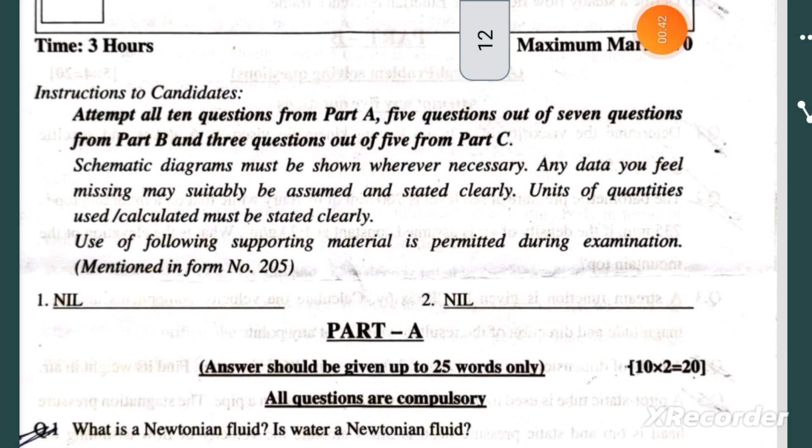नेक्स्ट हम क्वेश्चन पे दे जाते हैं। पार्ट ए है। क्वेश्चन नंबर 1, what is a Newtonian fluid? Is water a Newtonian fluid?

Question number 2, can the coefficient of compressibility of a fluid be negative? How about the coefficient of volume expansion?

Question number 3, give a real world application of Pascal's law. Question number 4, define the resultant hydrostatic force acting on a submerged surface and the center of pressure.

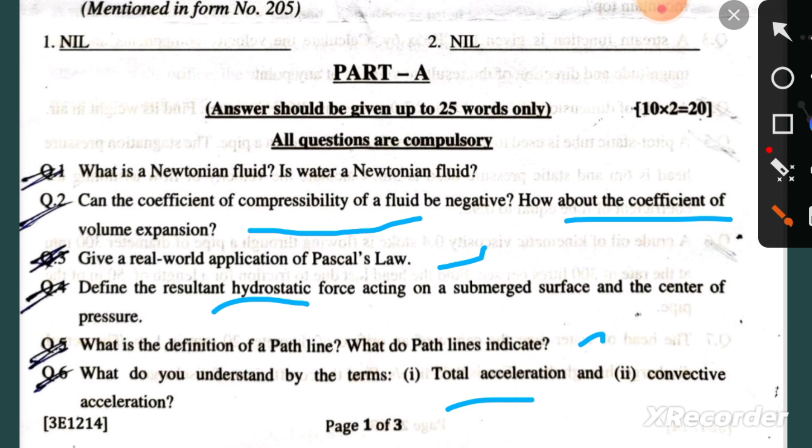Question number 5, what is the definition of a path line? What do path lines indicate? Question number 6, what do you understand by the terms total acceleration and convective acceleration?

नेक्स्ट आते हैं हम क्वेश्चन नंबर 7 पे। State Bernoulli's theorem, list out its engineering applications। क्वेश्चन नंबर 8, what is hydraulic diameter?

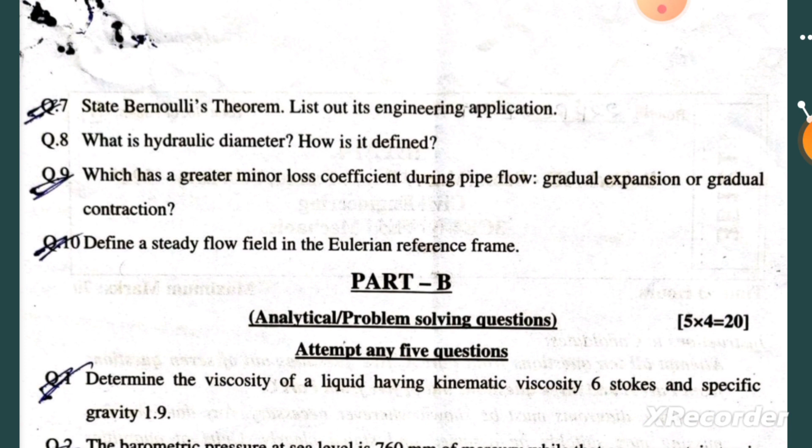How is it defined? Question number 9, which has a greater minor loss coefficient during pipe flow, gradual expansion or gradual contraction? Question number 10 है, define a steady flow field in the Eulerian reference frame.

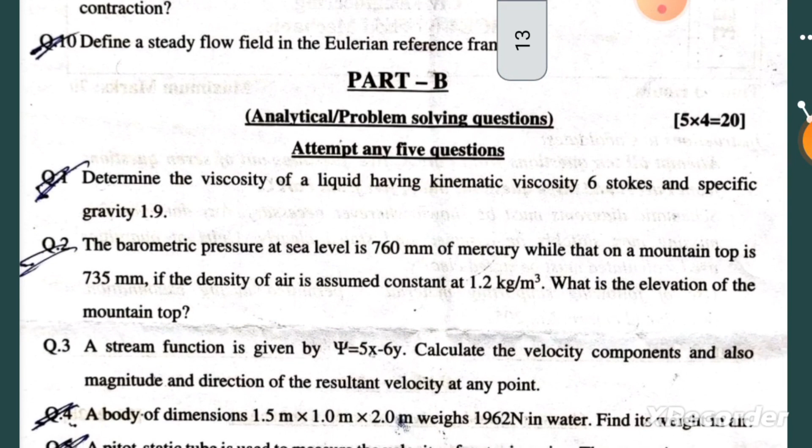अब हम बात करते हैं पार्ट बी की। इसमें 7 क्वेश्चन दिए जाएंगे, जिसमें से आपको कोई से भी 5 अटैम्प्ट करने हैं।

Determine the viscosity of a liquid having kinematic viscosity 6 stokes and specific gravity 1.9.

Question number 2 है, the barometric pressure at sea level is 760 mm of mercury, while that on a mountain top is 735 mm. If the density of air is assumed constant at 1.2 kg per meter cube, what is the elevation of the mountain top?

Question number 3, a stream function is given by this. Calculate the velocity components and also magnitude and direction of the resultant velocity at any point.

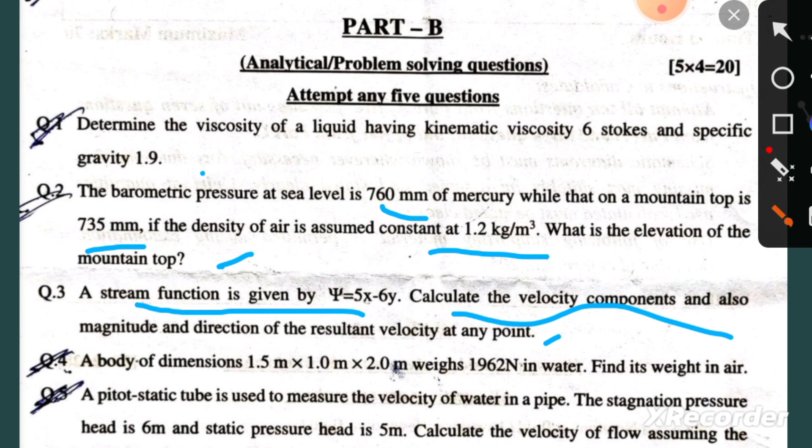Question number 4 है, a body of dimensions 1.5 meter, 1 meter, 2 meter weighs 1962 N in water. Find its weight in air.

Question number 5, a pitot static tube is used to measure the velocity of water in a pipe. The stagnation pressure head is 6 meter and static pressure head is 5 meter. Calculate the velocity of flow assuming the coefficient of tube equal to 0.98.

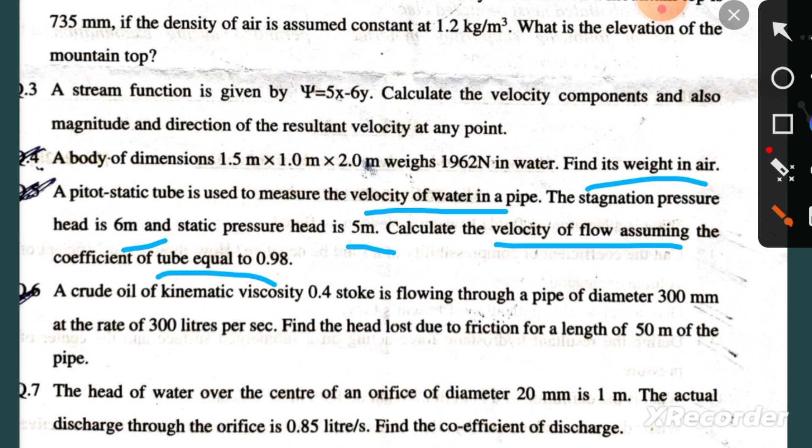Question number 6, a crude oil of kinematic viscosity 0.4 stoke is flowing through a pipe of diameter 300 mm at the rate of 300 liters per second. Find the head loss due to friction for a length of 50 meter of the pipe.

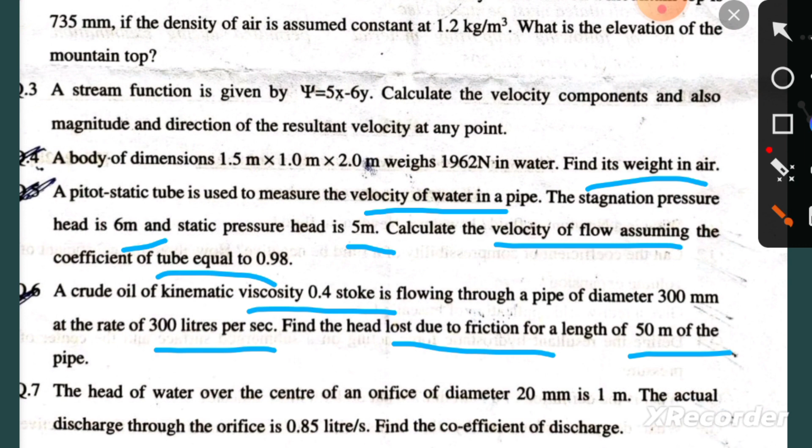Question number 7, the head of water over the center of an orifice of diameter 20 mm is 1 meter. The actual discharge through the orifice is 0.85 liter per second. Find the coefficient of discharge.

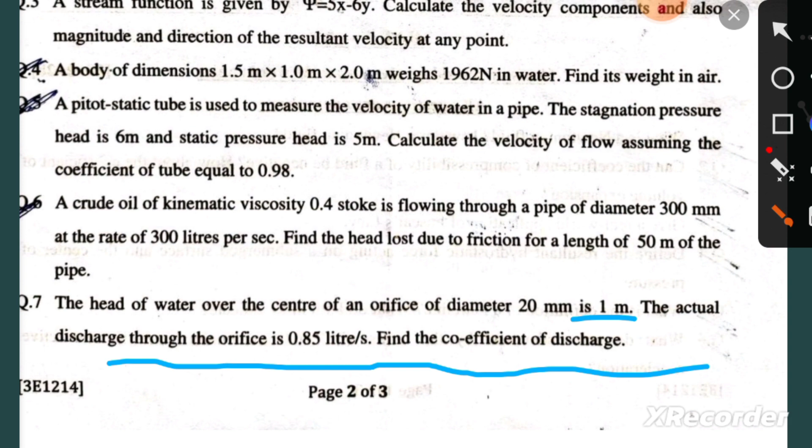इन 7 में से आपको कोई से भी 5 क्वेश्चन अटैम्प्ट करने हैं। अब हम आते हैं पार्ट सी पर। इसका क्वेश्चन नंबर 1 है, derive an expression for the loss of head due to sudden enlargement of a pipe.

Question number 2, a laminar flow is taking place in a pipe of diameter 200 mm. The maximum velocity is 1.5 meter per second. Find the mean velocity and the radius at which this occurs. Also calculate the velocity at 4 cm from the wall of the pipe.

Question number 3 है, if for a 2-dimensional potential flow the velocity potential is given by this, determine the velocity at the point this. Determine also the value of stream function at the point P.

Question number 4 है, derive an expression for the time period of the oscillation of a floating body in terms of radius of gyration and metacentric height of a floating body.

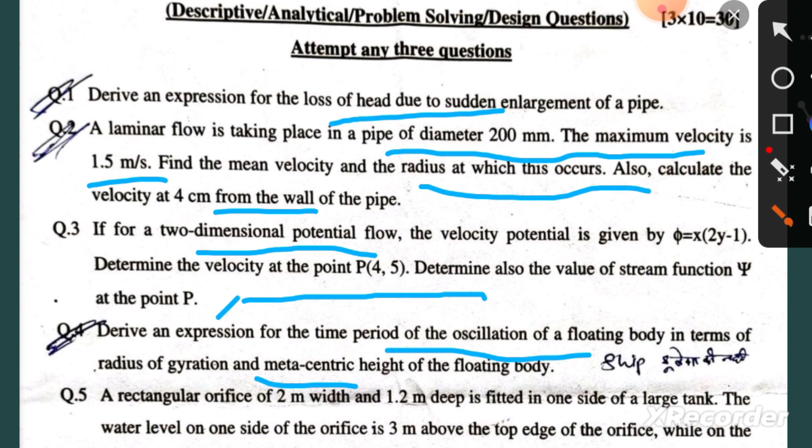क्वेश्चन नंबर 5 है, a rectangular orifice of 2 meter width and 1.2 meter deep is fitted in one side of a large tank. The water level on one side of the orifice is 3 meter above the top edge of the orifice, while on the other side the water level is 0.5 meter below its top edge. Calculate the discharge through the orifice if CD is equals to 0.64.

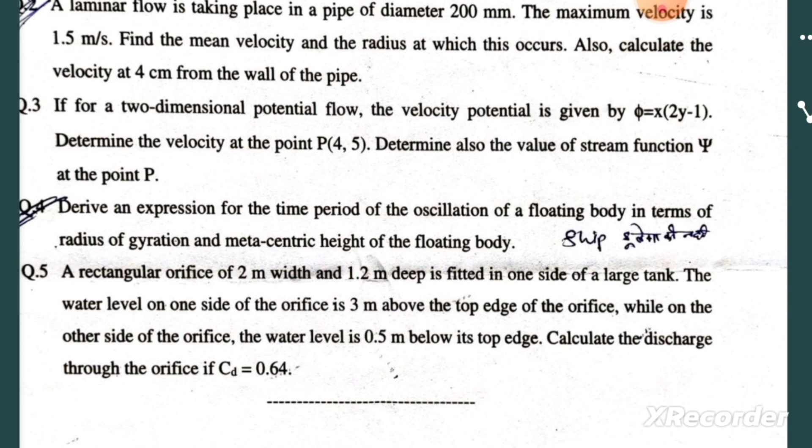इनमें से आपको कोई से भी 3 क्वेश्चंस अटैम्प्ट करने हैं। उम्मीद करती हूँ आपको वीडियो अच्छी लगी होगी और आपके लिए हेल्पफुल होगी।